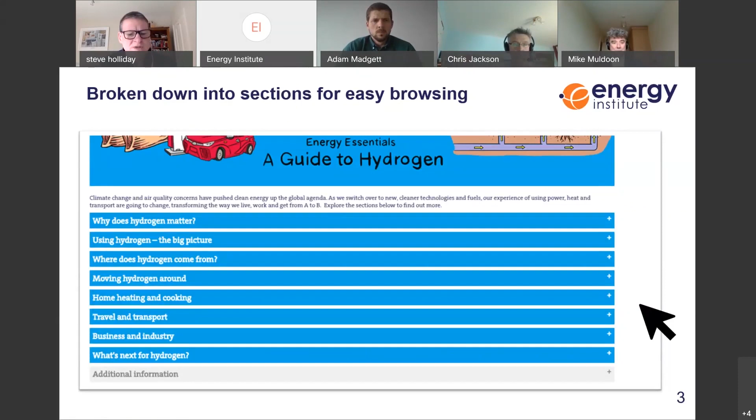Interesting, you don't have to read the whole guide either. It's set out so if someone wants to go in and interrogate it and just answer one of the questions, they can. So there's a detailed section, for instance, on hydrogen in the home or transport, as I mentioned. Next slide.

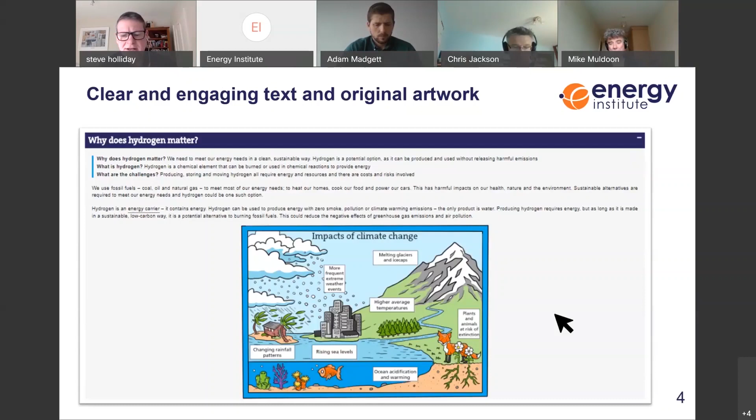We've got some really good graphics in here. I know in testing it with a few people that they've enjoyed that - they found it engaging and quite easy to read. All the jargon, because inevitably there is some jargon and technical terms, is all in a glossary as well. So you can hover over those and get a definition. Next slide.

And there's some maps. As we're going to be talking today, you'll certainly hear from Adam about the project in the north that's going on here. So you can hover over the map and get more details on each of these projects.

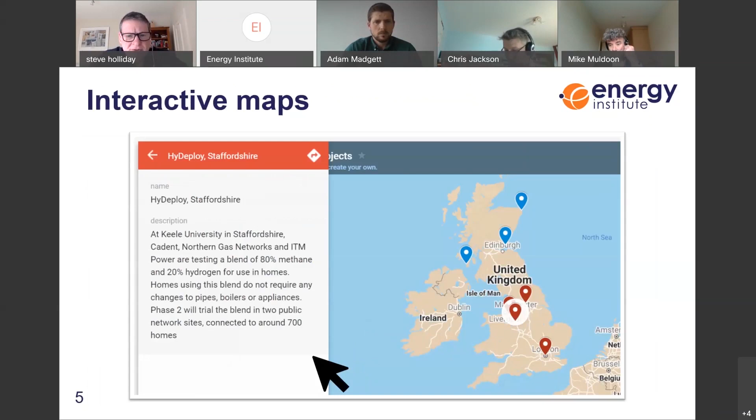So that's gone out today. I hope it's going to be helpful as hydrogen becomes more and more part of the policy in the UK, an easy guide to people starting to understand the opportunity and some of the issues that are there. It's free to download as a PDF, so please do share it amongst your networks, pass the links around. I'm certainly optimistic it's going to help more people start to talk about hydrogen and demystify some of the bad information that's inevitably already out there.

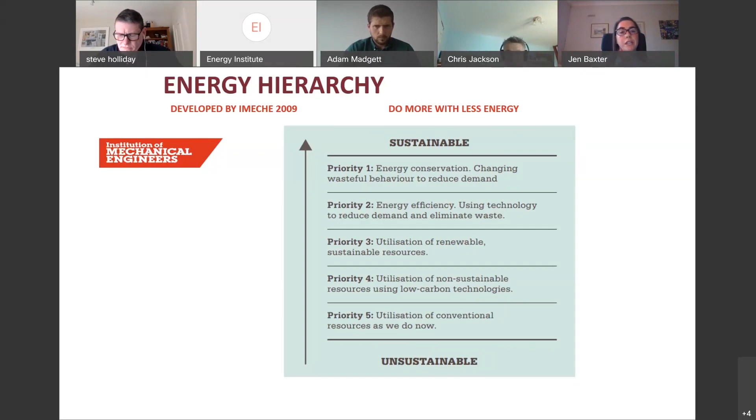This is just a quick slide that gives you some ideas around the production methods for alternative fuels, and I tend to work around most alternative fuels, so this is just one of my slides. Hydrogen is very similar in some ways to biomethane in the way that it can be produced, particularly if you're looking at it directly in gas form.

But when you're talking about producing it from electrolysis, it also adds opportunities around renewables with electrolysis and nuclear power with electrolysis. A kind of fun fact around nuclear and electrolysis is that if you produce hydrogen this way, you are using both the heaviest and the lightest elements found on Earth for your energy generation system. So that's kind of interesting.

Looking on the other side of the slide here, it just identifies how gases, both methane and hydrogen, can be used across our energy system. But in addition to that, you can also look at how it can be used in industry, as we use a fair amount of hydrogen in industry as well.

Another area I want to draw attention to, and I'll talk a little bit more about later on, is on the sustainability side. Using our existing assets in terms of sustainability means that we are actually making sure we are maximizing the use of the resources that are put into those assets. We're maximizing the skills that have been developed, the money that has been put in, and the way in which those systems connect to our wider infrastructure that already exists. So making sure we continue to use it is a really big part of sustainability.

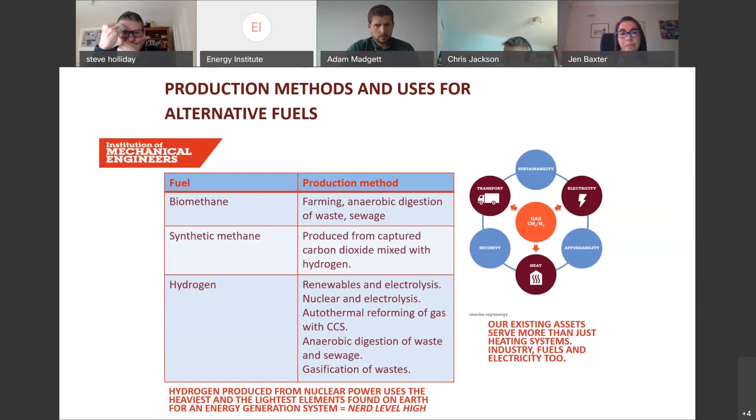Moving forward here a bit to where I think that we may start to see hydrogen used in wider systems. I know that people are familiar with the idea of hydrogen produced from wind or solar power, and as I've just mentioned, from nuclear power. But I think as we look into the future, it's likely that we will see different and much more mixed systems - mixed gas production, biomethane, synthetic methane, and hydrogen being produced together in the same sites.

Electricity and gas systems, so power to X - this is where we use electricity to produce a gas like hydrogen through electrolysis, or you can use it to produce a liquid as well, so for fuels too, such as synthetic jet fuel. Also district heating and mixed gas fuel cell systems. I'm not specifying which gas these fuel cells could come from, but hydrogen is an option, though there are other gases that can create fuel cells as well.

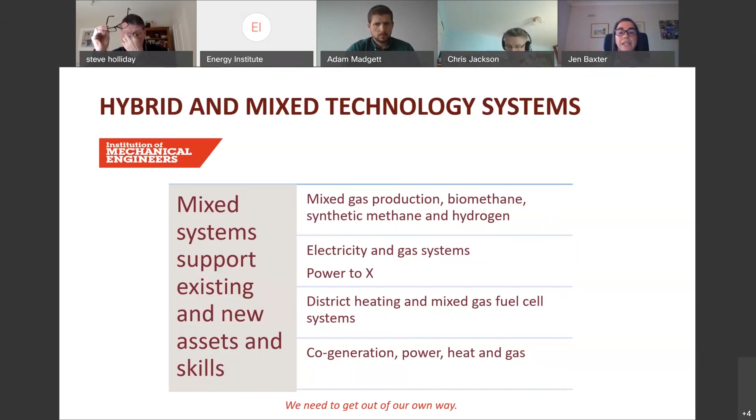And cogeneration - power, heat, and gas. Nuclear power is a really good option here for how you bring together different parts of the energy system to produce power, to produce heat, and also then to go on to produce hydrogen as well.

I've borrowed a couple of slides in this presentation from my colleague Chris Jackson from Protium - a different Chris Jackson to the one on the panel, also working in hydrogen, just to add a little bit of confusion. This just identifies how the different parts of the system could work.

Enabling the renewable energy system - enabling large scale renewables, distribution of energy across sectors and regions, and then looking at how it can act as a buffer for increased resilience within our electricity and energy systems. And then there's decarbonising the end uses, so transport, energy use, building, heating and power, and also serving as feedstocks, as we mentioned previously in industry. I think this is an important factor which I'll come back to again, because it starts to help us identify how we can begin to build a hydrogen economy.

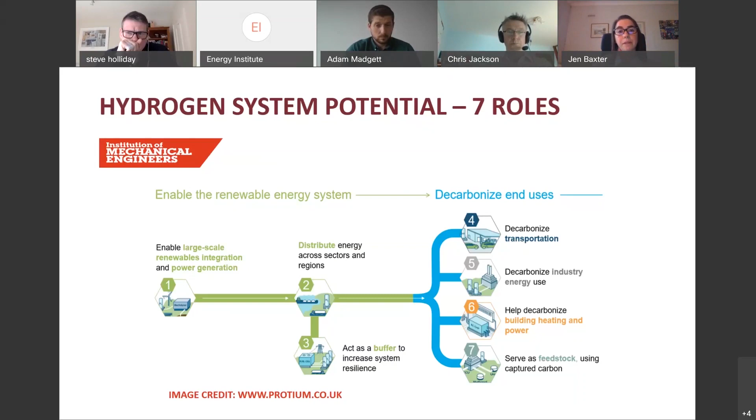Looking at the sustainability angle, now we don't talk about this so much when we talk about hydrogen, or actually even when we talk about renewables, because it often goes with some kind of assumption that new cleaner technologies are automatically sustainable or green, and that isn't actually always the case.

I wanted to draw attention to parts of the hydrogen system that really do meet good sustainability criteria. One of the good things about hydrogen is that it can be produced in the UK using low carbon electricity. You can create a system here where you don't need much input from anywhere else. We've got wind, we've got water, we've got all of the things we need for this system.

It can be produced using waste, so again it allows us to look at different parts of our waste production and how we can use those to ensure that we are being as resource efficient as possible.

It can become an export for the UK. Now this isn't an area that I think is the most important, it's just a fact, because transporting hydrogen is not the easiest thing. Compression is difficult, and liquefying hydrogen loses a huge amount of energy. So that's not necessarily the best thing, but it's an option.

It uses infinitely recyclable materials like platinum in fuel cells. This is a non-ferrous metal that can be recycled forever, and there are a lot of other technologies that don't have that option. It allows us to reduce the use of non-recyclable materials and the environmental damage that potentially goes with the extraction of those materials.

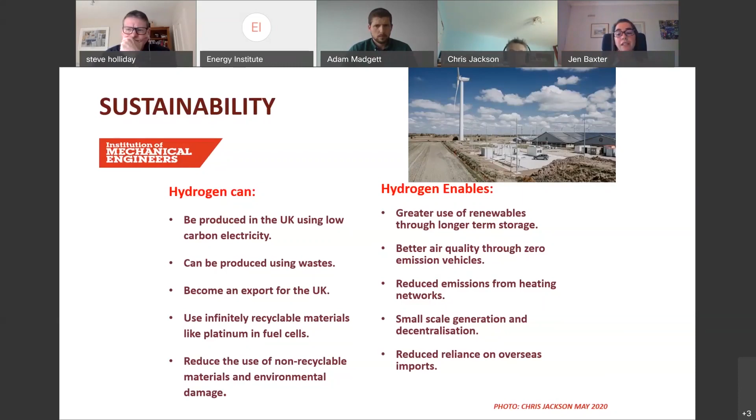In terms of the user experience, I'm sure other people will talk about this a lot more, but to a certain extent, if you're not an engineer and not working in design, build and servicing and maintenance, your experience may be very similar. There'll be upstream production and transportation, as we see in oil and gas now. There'll be refueling, again a very familiar activity that happens in petrol stations right across to refueling at ports and at airports.

The existing gas infrastructure will be there to allow us to access the 85% of homes through heating that uses gas, and we can reduce the CO2 emissions from that. As we gradually are able to increase the blend, and I'm sure somebody will talk about that, a reduction in emissions goes along with that.

And then for green hydrogen use in industry. As I mentioned before, this is really important because it's an area where we use a lot of hydrogen in terms of petroleum refining, which will reduce, but also in the manufacture of food and electronics and obviously fertilizer too, which we're possibly likely to end up using a little bit more of because there are issues with soil. So we have to start to work out how we do this in a much more sustainable way. But there's a short-term opportunity there, and that means we can begin to build that market.

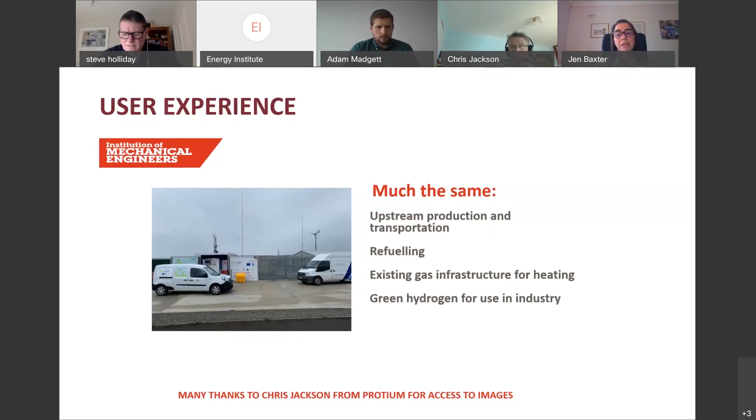In terms of socio-economic, the creation and expansion of markets, as I just talked about, has been a struggle for hydrogen for a long time. From when I first started studying it, what goes first? Do you produce the hydrogen? Can you produce enough of it, or do you use the hydrogen? How do you do it? And we're still struggling with that today.

We need to look at how building regulations work. There's a lot of work going on in the background around safety for appliances, for other aspects of our lives using hydrogen.

How do we manage an incident in a tunnel, for example, if you've got a train that runs on hydrogen? There's all sorts of work going on in the background.

Today, along with some colleagues of mine, we've launched the Levelling the Playing Field in Policy. Working with Chris Jackson at Protium and members of the hydrogen industry, we identified a number of anomalies within policy that mean hydrogen is actually disadvantaged as a decarbonisation tool. There's lots of aspects around that where we need to innovate a bit more.

One of the most transformative areas is in our thinking. We spend a lot of time, as was mentioned earlier, saying this is the solution to decarbonising our global industries—no, this is the solution. You just end up in these running arguments with each other that never result in the actual production of any infrastructure or any plant, and we don't actually move forward.

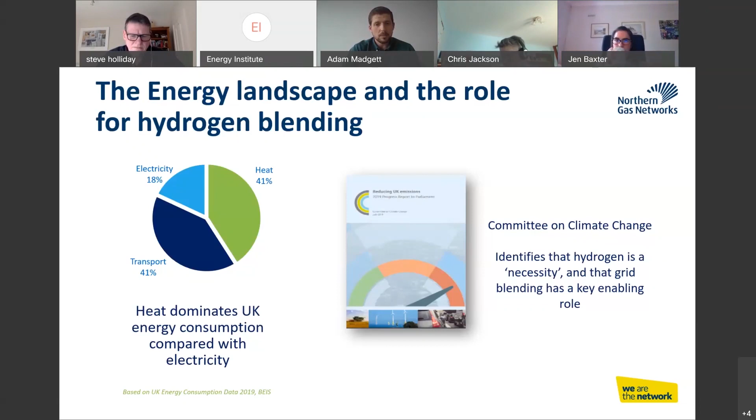This is why networks like Northern Gas Networks are investigating how we can decarbonise this issue. In addition, there is support from the likes of the Committee on Climate Change, who advise government on carbon policy, which identified that hydrogen is a real necessity in reducing our carbon emissions, and that grid blending has an enabling role in the transition to using 100% hydrogen.

So just briefly on HyDeploy, it's a program focused on demonstrating the safety case for 20% hydrogen in the existing gas networks. It's split over 3 phases. Phase 1 is taking place right now at Keele University in Stoke, where we are blending in around 101 residential properties. Phase 2 is a public trial in the northeast of our network, where we aim to be blending in around 668 properties, and phase 3 is a further public trial within Cadent's network.

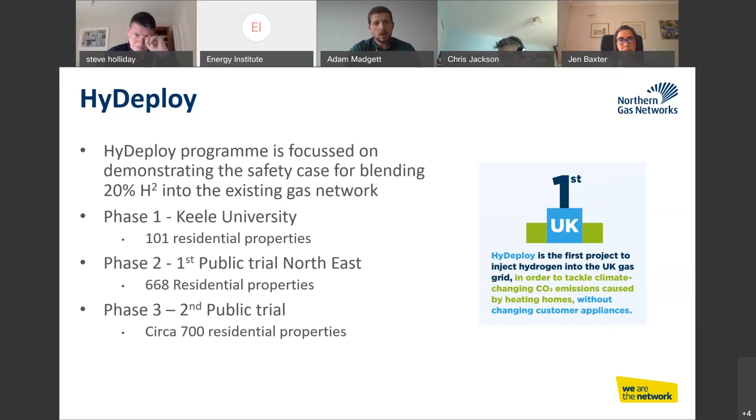As I mentioned, we are down at Keele at the moment, and we are blending. To get to that point, there was a significant amount of work that the project team put together to allow us to progress towards that milestone of injecting hydrogen into the network. For example, we carried out extensive testing on the types of materials on the Keele network, looked at the gas characteristics and how they might change with a blend, and carried out extensive customer engagement with customers involved and not involved with the trial, to see their views on using this new green source of gas in their properties.

But one of the key areas we looked at was how appliances might perform differently with an increased amount of hydrogen in the gas stream. It's obviously quite a poignant topic for today, and what I'm here to say is that the outcome of that research is really quite boring - customers don't need to change a thing. The appliances, their cookers, their boilers will operate the same as they do now on natural gas, as they will with up to 20% hydrogen.

This picture on the slide is an extra piece of work we commissioned down at Keele, where we've got 4 pairs of boilers from the leading boiler manufacturers in the UK. One is operating on a blend, and one is operating on natural gas. At the end of the trial, we're going to hand them back to the suppliers to see if they can tell what effect that has had on the boiler, and we don't anticipate anything coming out from that.

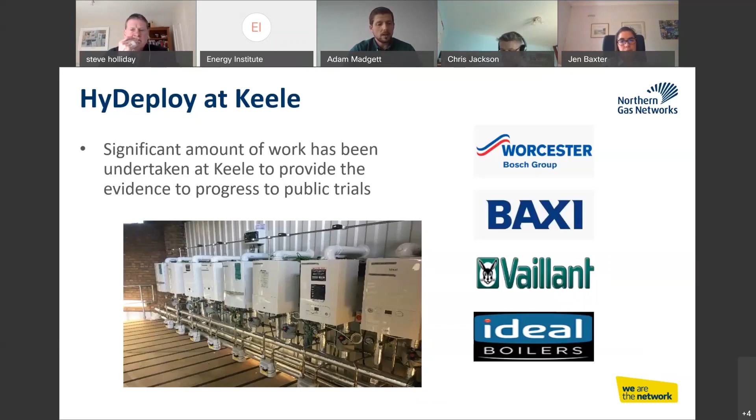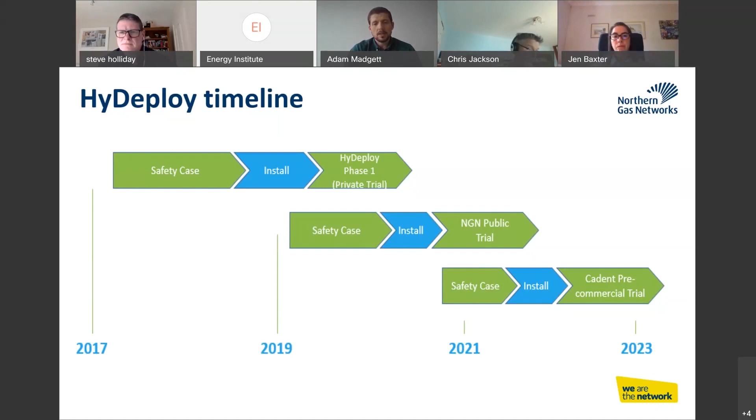In terms of timelines, we started the project in 2017. We're looking to finish by 2023 with the second public trial, and when we get to that point, we as networks would be comfortable to say that from a safety and operational perspective, there wouldn't be any barriers in rolling out hydrogen across the UK. There may be some other work needed in terms of commercial arrangements to stimulate a hydrogen economy, like we've had, for example, the renewable heat incentive, which was used for biomethane injection.

The blending benefits are quite clear in terms of, it's easy for customers - they haven't got to change anything in the way they currently heat and cook their homes. There are significant carbon savings, the equivalent of 2.5 million cars being taken off the road if it was rolled out across the UK. And it allows us to build up evidence to move forward to that transition to 100% hydrogen in the future.

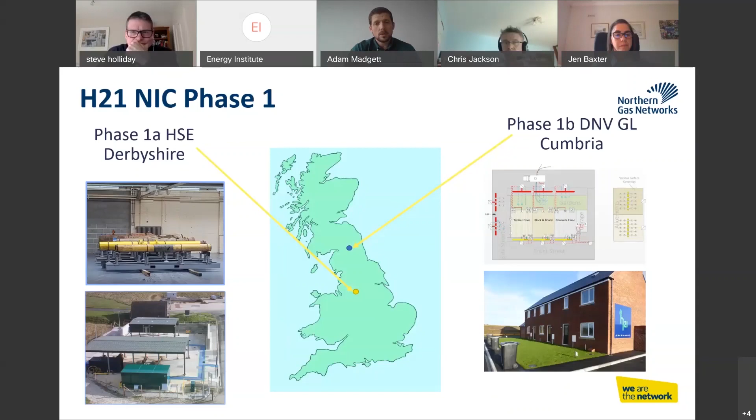Another one of our projects we're involved with is the H21 project, which is focusing on 100% hydrogen, as I discussed earlier. This is being led by NGN in partnership with the rest of the gas distribution networks, and is currently split over 2 different phases. Phase 1A is taking place at the HSE's site in Buxton, and Phase 1B has taken place at the DNV GL site up in Cumbria, at a test site in Cumbria.

So just going into them in a bit more detail, the background testing was all around existing assets in our ground, taking them from our network and testing them at the HSE site to see how the leakage rates compared to natural gas on these existing assets. So testing them on natural gas and then testing on 100% hydrogen.

And there's been some positive results to date, in that the assets that leaked on natural gas leaked on hydrogen, and the ones that didn't leak on natural gas didn't leak on hydrogen. I know that's quite vague, but the results are being analysed at the moment, and they'll be due to be published in the near future.

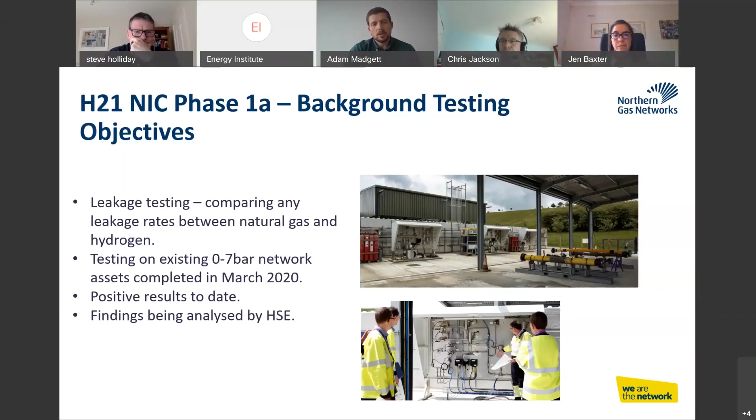Phase 1B is all around the consequence testing. So if there was a leak, what would happen, and how the gas might behave differently. We take that learning from phase 1A and apply it into phase 1B. Again, these results are currently being analysed and will be published in the near future with the phase 1 results.

As I touched on, it's quite a key point around the social sciences side of introducing a gas like hydrogen. A separate piece of work the project undertook was the social sciences work, and there were some key findings from this, in that what customers highlighted is that they didn't consider safety as a barrier for acceptance. They trusted that the networks would be doing the right thing for customers.

However, as you can imagine, disruption was a barrier, and this is work we're looking to explore further in future phases. I think one of the key outcomes from the project, and it won't surprise you, is that customers want to be told the facts. They want to know what's going on, and they want to be brought along on the journey. As I think we all agree, that's the most sensible approach to get us towards this decarbonisation future of using hydrogen.

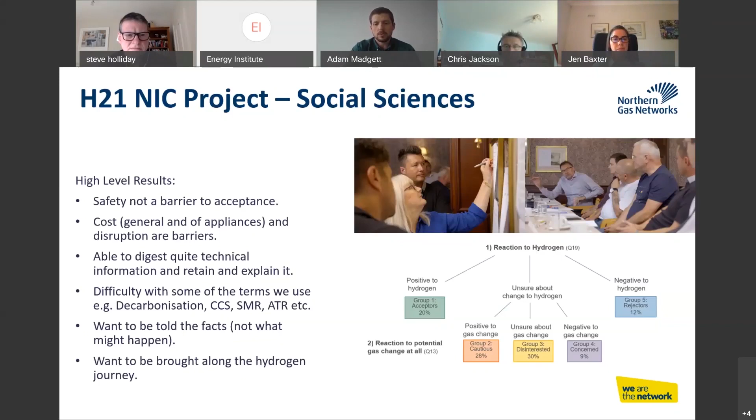Further on, there's a next phase for H21, and this is really building the stepping stone to the next step of providing evidence that will underpin any future work for us to move forward to a public or community trial, prior to conversion, similar to what we did with Towns gas to natural gas.

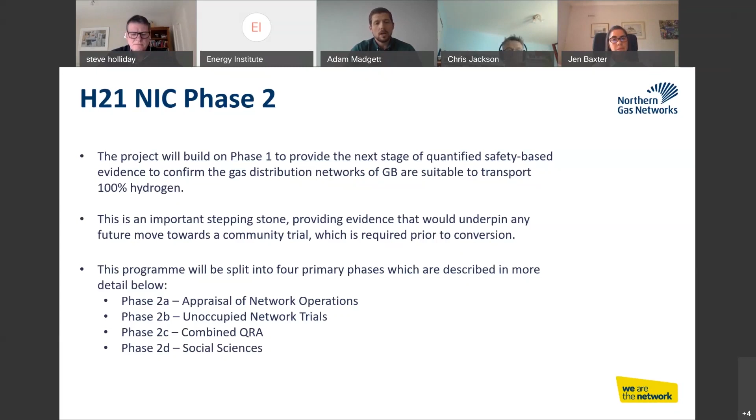And just briefly, the different phases in this next piece of work are looking at network operations and how our operatives might operate differently on 100% hydrogen. What do we need to change within our procedures and practices? An unoccupied trial - once we've identified what we need to do differently with our procedures, how might we go about actually doing that? And then a combined quantitative risk assessment to compare how safe it would be on 100% hydrogen, and also a further piece on social sciences.

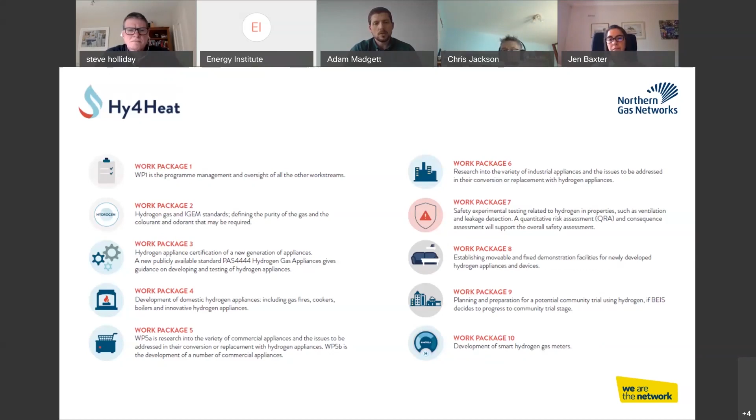So just briefly I'll go over this. For the Hy4Heat program, this is a BEIS project focusing on downstream of the meter, and there are various work packages in this project which support networks working on 100% hydrogen, ranging from new appliances to the potential for industrial uses of hydrogen. So you can see with the networks and the government working together, there is a joined-up effort and approach to how we could use this as a potential low carbon source of gas in the future.

One thing that is key to this is that we do need industry to come along with us, and the facts are clear that industry is responding. For example, we've got Worcester Bosch's hydrogen-ready boiler that they launched this year, and I know Baxi are carrying out innovation in this area as well. Most recently, we had the Hydrogen Task Force, created in March 2020, which sets out the role of hydrogen in delivering net zero. So there is that supply chain focus as well within this approach to 100% hydrogen.

Sorry, having a bit of technical difficulty here. There we go. Right.

So just a brief summary of what we're looking at. In terms of what the networks are doing, there's a number of programs exploring the use of hydrogen in our homes. Blending we really see as the first step in reducing carbon emissions, as we haven't got to make any changes to customers' appliances or their behaviour, and we can build on that to focus on 100% hydrogen in the future.

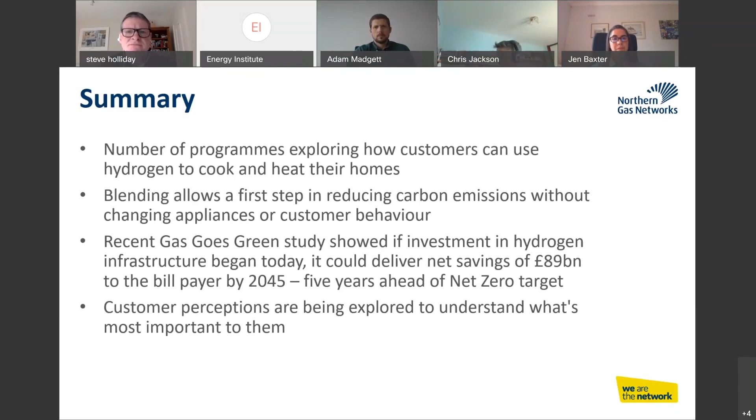You are on mute, Chris. Chris, you're still muted. That's it, got you. Oh, you can hear me now? Yep, over to you, Chris. Wonderful, thank you. Locked out for a second there. Hello, everybody. Hi.

Today my task here is to demystify the use of hydrogen as an energy storage medium or an energy transport medium from renewable energy. My experience is 23 years in hydrogen and fuel cell systems, covering development of fuel cells, steam methane reformers, integration with renewables, and infrastructure in a number of different places around the globe.

Having a technical challenge moving the slides, unfortunately. There we are.

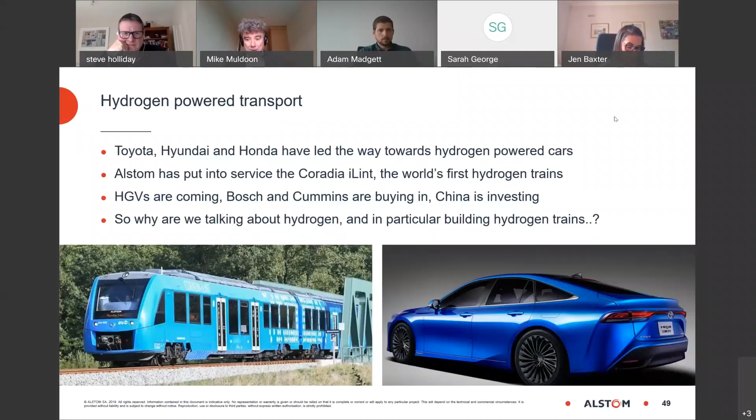I'm still mystified as to which button made that work. That's gone too far now.

So the reason, as Jen mentioned and Steve said in his introduction, it's about storing energy. If we want to move anything, we need to use energy. Apologies in advance, Jen, I'm not an engineer, so excuse my use of the phrases, but fundamentally it takes energy to move anything. On the railway network, we have a brilliant solution to low emission movement of vehicles. It's called electrification. Like with the point Jen made initially, electrification is key to creating a decarbonised railway, and if we're going to get to net zero in 2050, a decarbonised railway is key to our transport infrastructure.

However, we find ourselves currently with roughly 40% of the UK rail network electrified, even just 25% in Scotland, for example. So we have huge areas of the network that are not electrified. And whilst we could get cracking and electrify them, Alstom provides electrification, and we in fact provide all of these solutions that I'll talk about.

There is clearly a need for a range of solutions and options. What we do need in the industry are zero emission self-powered trains, as we might call them. Those are trains that haven't got a wire or a third rail to conveniently pick up energy through - they are trains that have to take it with them. Traditionally, we've always used diesel for that.

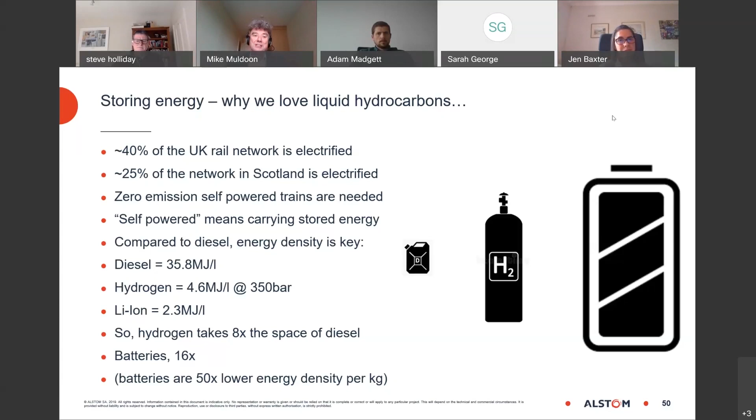And again, I go back to tribalism - please don't anyone interpret me talking here about hydrogen to mean we wouldn't talk about battery trains or combined solutions of these technologies. In fact, most of the vehicles that use fuel cells also use batteries, because if we go back to the fundamentals, the more efficient you can make your energy system, the less energy you need to carry. If we can recapture braking energy and other forms of waste energy, we can actually reduce our overall consumption, which helps our ability to travel further on the same amount of energy.

So if those are the reasons why we're using it, today's discussion is around the user experience. My thunder's been stolen slightly because, as Jen pointed out, it's pretty much the same. If we could do a hands up - and I can't see you all, but if we were in a room doing a traditional seminar, I'd say hands up who's been on an electric train - I bet about 90% of the room, if not all of you, would say I have. And a hydrogen train is fundamentally an electric train.

So that means it's quiet, it's clean, it's efficient. Compared to a diesel, it has a smoother ride and none of those attributes we associate with even the best installations of diesel engines around vibration and noise and what have you. So from that point of view, the user experience for a customer or passenger on a train is very, very familiar.

I've been talking about one particular type of user, but any system has potentially multiple users. Looking at the passenger experience, a hydrogen train is like a new electric train - you get your facilities, you get comfort, you get Wi-Fi, everything that today's 21st century train should provide. Exactly the same applies to other modes of transport.

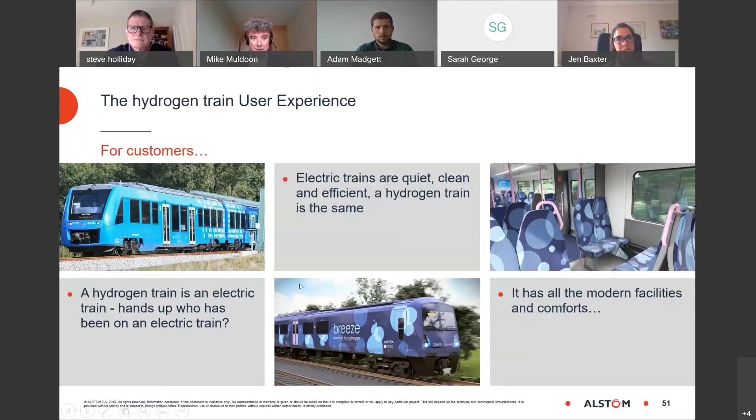So who are the other users of trains? From our point of view, a key user of a train is actually the operator.

If you're a car driver, you are the operator and the customer because you own it and you drive it. But in the train world, the operator is a different organisation - they're the people you buy your ticket from, and they're the people that move the train from A to B. From their point of view, there's a different set of user experiences.

Obviously, they want their passengers on board to be satisfied, comfortable and safe, and they get that. But they also get the benefits of zero emissions in stations and in their depots. That means those passengers are not exposed to potentially harmful emissions anywhere along their journey, even in a station with a roof. It also means their staff can work in a cleaner environment, with less need for the types of controls that are necessary in a diesel working environment.

They also get all-weather performance. Of course, with diesel, that's taken for granted largely. All vehicles, and diesel is not immune from this, can suffer in cold weather, but the hydrogen train is an all-weather vehicle. It doesn't have a significant performance reduction because of the cold, and it can offer in current form a range in excess of 1,000 kilometers and speeds of up to 160 kilometers per hour.

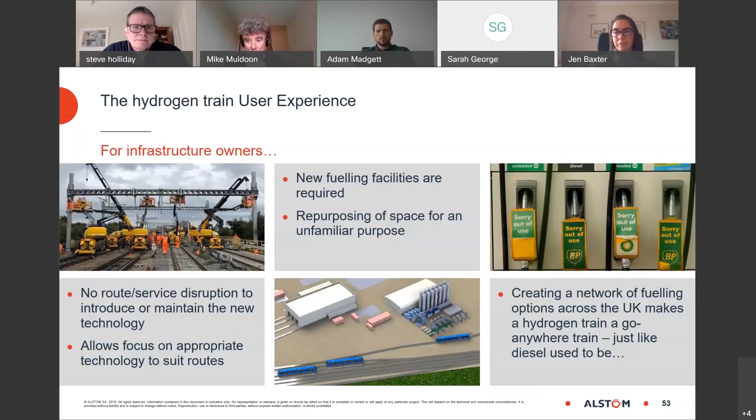So finally, for the UK, we currently have a proposed product, a converted train, which is available now, market ready. It needs to go through its first deployment and appropriate approvals to be deployed. But we are at the point in the industry to be able to offer hydrogen technology in the rail network as of today, and that would take 3 to 4 years to bring into passenger service. But it's at that state of readiness.

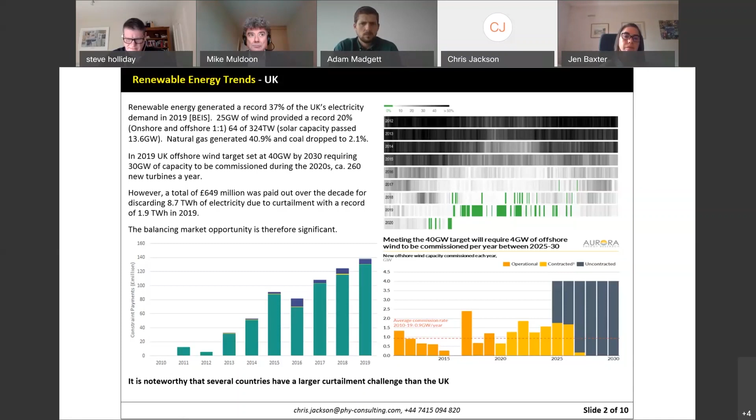So quite often when we talk about hydrogen, there's a discussion around battery or other energy storage solutions versus hydrogen. And really, that is only a question at comparatively small scales.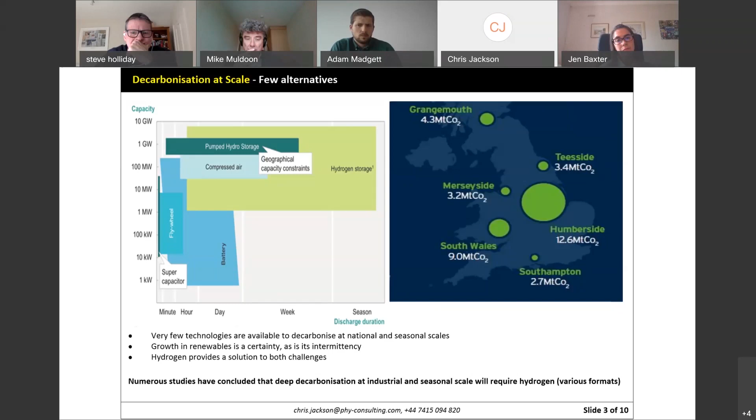In talking about hydrogen, when it's used in this way, it's good to clarify the difference, since it's referred to in a number of different ways. It's quite likely that you will hear the terms grey hydrogen, blue hydrogen, and green hydrogen. They're basically defined in the following way.

Grey hydrogen is the hydrogen that we have today. That hydrogen is generally used industrially, generally generated on chemical sites where it's used, in reasonably significant volumes. But it's generated from steam methane reformation, and generally that does result in carbon dioxide emissions. So that form of hydrogen production is termed grey hydrogen.

The carbon emissions can, however, be captured, and when they're captured, some of the other projects mentioned, H21 earlier as an example, when that carbon dioxide is captured, it can either be used and converted into other chemicals, or at a much larger scale, it can be deposited into subsea or underground onshore caverns.

There are a number of different areas that can be done, from the top of the country to the bottom, and indeed globally. There is significant work globally in the area of carbon capture to be able to produce blue hydrogen. Another way of producing hydrogen is to split water.

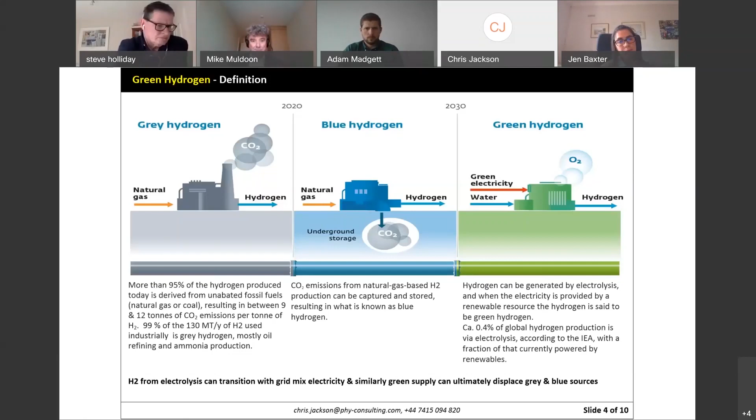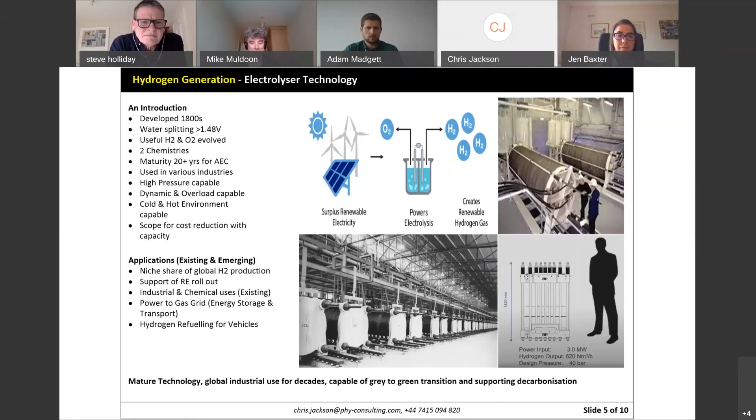In the middle bottom slide here, we can see banks of electrolyzers generating 30,000 normal meters cubed per hour, which is hydrogen generation at a significant size. And that was in the 1930s.

That technology was generally alkaline based, but now we have more options in terms of electrolysis. So we have what's called proton exchange membrane electrolysis, or PEM electrolysis.

In addition, while I have two chemistries written on the slide here, there are actually three. A far less common form, which is under development, is solid oxide electrolyzers. Fundamentally, all of those technologies can separate water into hydrogen and oxygen.

You can see a modern example of that in the top right-hand corner, the approximate size of a 3 megawatt system. That's able to generate just over, between 1.2 and 1.4 tons per day of hydrogen. You can see that next to a human being.

The benefits of electrolysis are that they can be ramped up and down, so they can respond to changes in demand or production on the grid. They can operate in a range of different environments. Industrially, this technology is used from Saudi Arabia to Siberia, so there are thousands of systems deployed globally.

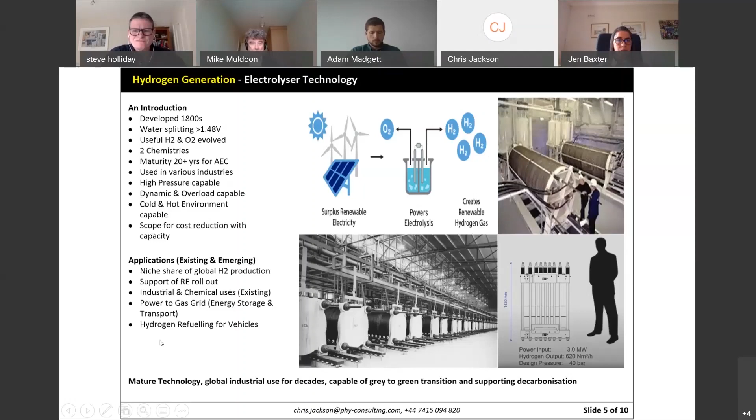There are many trials globally with many different examples. I've selected, for the demystification remit, one location: Orkney, an archipelago off the northeast of Scotland. I wanted to mention a couple of applications trialed there using renewables. HyFlyer is a project which looks at the use of renewably generated hydrogen as an aircraft fuel. HySpirits looks at fuel switching to provide heat for the distillation of gin.

Big Hit was a project which used renewable energy to provide hydrogen for heating in schools and for transport around the islands. Surf and Turf was a project which demonstrated the first use of tidally produced hydrogen globally. HySeas considers the use of hydrogen in shipping.

We've got the use of hydrogen in HyDime, in internal combustion engines in driven vehicles, and Sea Fuel, which considers the conversion of seawater into hydrogen fuel. So you can see the number of demonstrations and the breadth of different applications goes on and on.

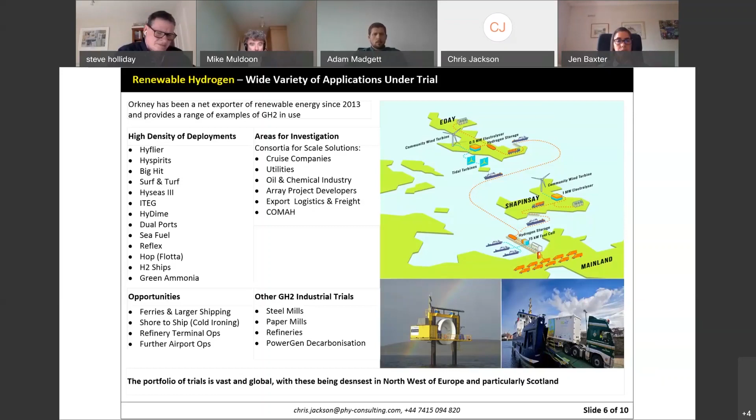In addition to that, I've just been moved forward. Yeah, if you can draw us to a close, Chris, please. Yep, certainly. In addition to that, we have...

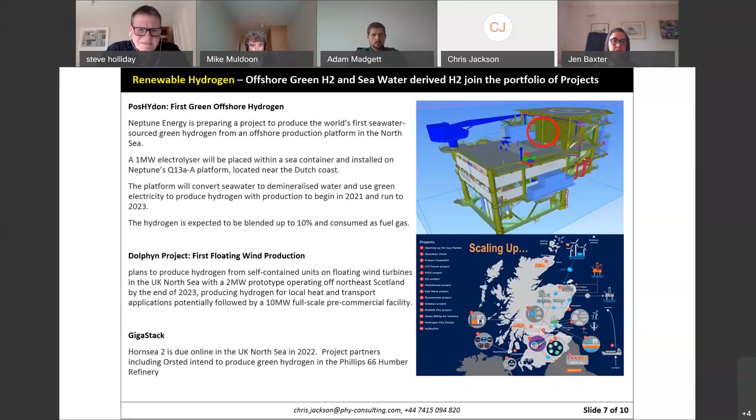In addition to the current projects under discussion, I've shown a wide range of different applications. Some of the largest wind companies in the world and oil and gas companies are partnering together to demonstrate the use of offshore assets, so wind and the repurposing of oil platforms, in order to generate significant scales of hydrogen at sea, and then bring that back either as a mixture with the gas currently generated or for use in 100% hydrogen pipelines back to shore for industrial use. There are a number of these projects coming through. There are 3 mentioned on the slide, but there are many.

The production and transportation of hydrogen are of course linked, and there are, as Jen mentioned earlier, a number of different ways of moving hydrogen. Currently we commonly see it as a compressed gas, but as some of the other presenters have demonstrated, this can also be done blended with methane in pipelines. But there are other options - hydrogen could be moved as liquid ammonia or liquid organic hydrogen carriers as well.

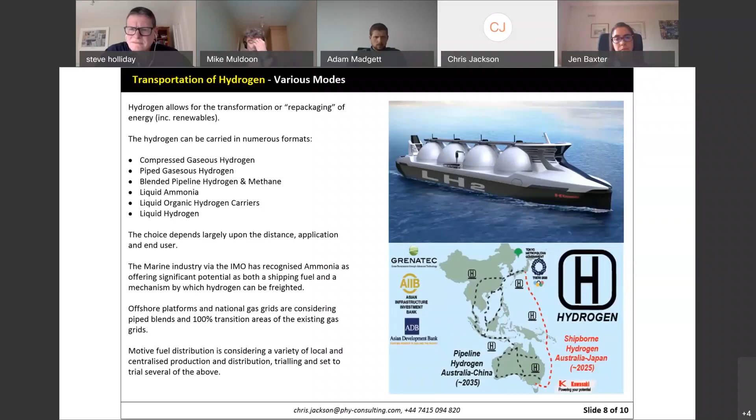Ammonia is a globally transported material largely used in the fertilizer industry, so there are already standards for moving this around the globe. In terms of organic hydrogen carriers, these are materials that can absorb hydrogen into effectively a heat transfer oil, widely used in industry, and it can move hydrogen from the source of production to the area of use and then release the hydrogen for use as a gas. A few words to say - the marine industry has given significant backing to the use of ammonia for their own fuel and for transport.

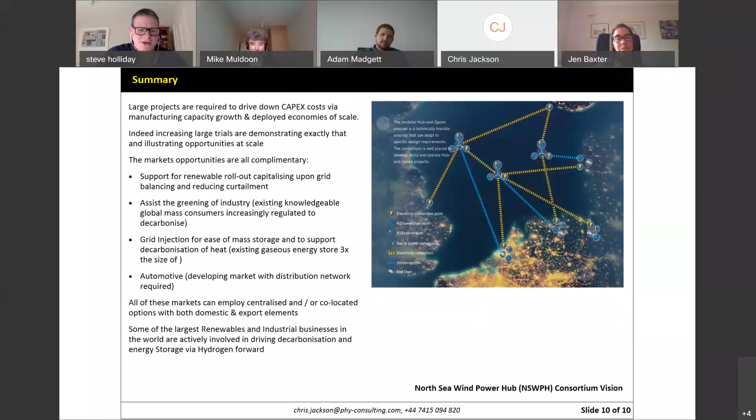I've got a load of questions in here that cover, unsurprisingly, everything from costs to technology, carbon footprint, etc. So let me, in no particular order, just start. Actually, Adam, perhaps there's a couple of questions here that probably get back to you. You mentioned during your presentation that there are going to be some results coming out of the trial. How are those results going to get published?

So in the two different projects, with reference to H21, because I've seen some of the questions on that, the reports will be published with Ofgem. It's an Ofgem funded project, so it's a network innovation competition project, and we are duty obliged to share any learning that we've gained.

So they'll be published through that route. With regards to HyDeploy, some of the technical papers and work that's been carried out, the aim, especially for the next piece of work that we've carried out, is to be published on IGEM's documentaries on their website, so it can be accessed by anyone.

But that will be later on this year, and similarly with the H100 project, that will be later on this year. If we do send any communications out to the people that attended, I can attach copies of the website addresses where more information on this can be found.